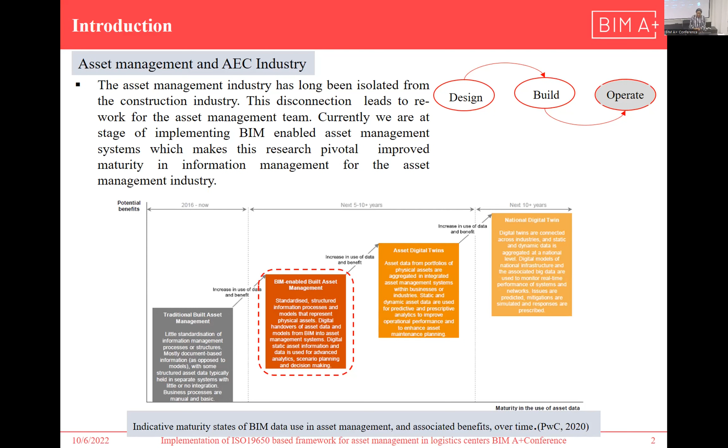And the next stage most likely would be the asset management team taking advantage of the BIM models and using it to create digital twins to manage the assets properly. And assets in this case covers the buildings, the machines, the pipelines, and whatever the client considers to be important for maintenance.

So the project objectives are basically summarized into 5. The first step is to define the information requirements according to ISO, and the information requirements that are specific to asset management are the OIR, AIR, and EIR. These documents are important to asset management. And also to develop the level of information need. But in this case, the level of information need is very specific because it's tailored to meeting the needs of the asset management team. And also create a BIM model, which is just for the case study for this project.

And also make use of COBie to accurately map the data from COBie into the asset management software, which for this case study was IBM Maximo. And at the end of the day, we also wanted to have the BIM viewer within the asset management software environment using Autodesk Forge.

So the thesis workflow is basically, we analyzed existing information from the client. They had existing information in form of CAD drawings, and they have schedules, the current asset management processes, their naming conventions, IDs, and the way they maintain their documents. We analyze this information and we use it to develop the level of information need. And finally, the information defined in the level of information need was used to develop the BIM model along with all the information right inside Revit.

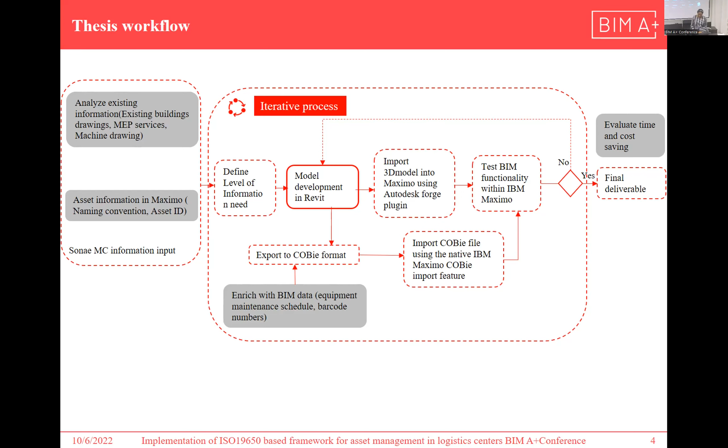Then finally, export COBie data, update COBie data, import COBie data into IBM Maximo, which is the asset management software, and also import the BIM model using the Autodesk Forge plugin into IBM Maximo, then test the functionality and use them to create work orders, and at the end of the day, evaluate how successful it is, how useful it is to the asset management team.

So the first step is defining the information requirement for the maintenance team. This process was a little bit tasking because it's different when you are defining information requirements for construction. But for asset management, you need to ask a lot of questions because they are not so familiar with the rules and with the words we use in the construction industry.

So I had to ask the maintenance team about their goals and objectives. For example, we can see one of their objectives was to reduce corrective maintenance through visualization. And for each of the goals they defined, we attached information requirements to the goals. And finally, standards that would be implemented to achieve these goals.

The AIR basically just defined the scope of the asset information that they want to keep. Because, for example, the clients in this case place more emphasis and more importance on their equipment and their pipes and everything. They care less about the walls or the columns. So it's very important, but we kept less information on these assets in this regard.

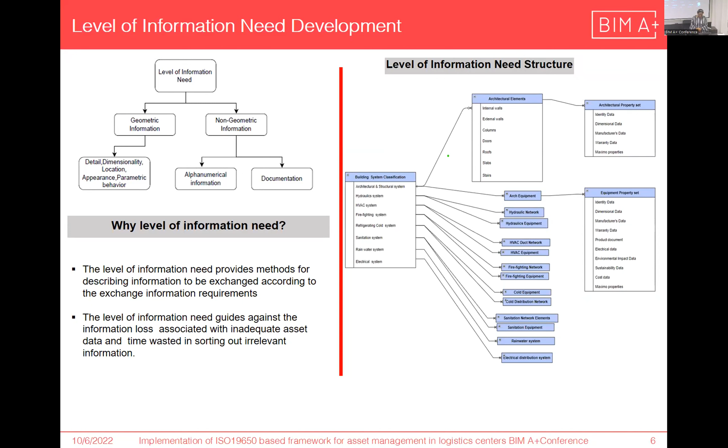So we spent time developing the level of information need because it is very important. It provides the method for describing the information and also leads to time saving, so we don't spend a lot of time sorting out information irrelevant to the asset management team. It also helps us in creating information in a structured form.

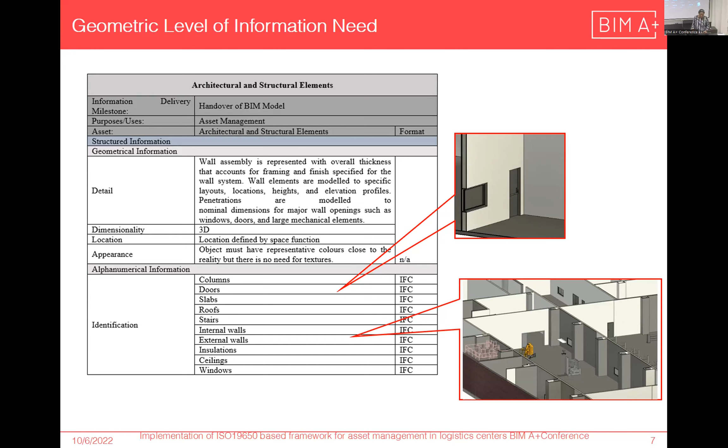For the geometric level of information, briefly, this is an example. We did this for all the other systems. This is for architectural and structural elements; they were grouped in the same group. We defined them in simple English words that can be interpreted by an appointed party at the end of the day. So in this group, we have the columns, doors, walls, and roofs—basically the static parts of the building. We defined their geometric level of information in this format.

Then for the non-geometric level of information need, we spent some time creating property data templates, which is very important to the asset management team. This is just a template that has the property sets that the maintenance team are going to use.

Because at the end of the day, when we create BIM models in construction, we have a large amount of property lists, window sizes, sizes of ledge, and things like that. This information, most of the time, is irrelevant to the maintenance team—they just want specific information on specific assets. So this template was created to guide the appointed party so that they know exactly what is required by operations and maintenance, and they prepare the BIM model to match these property sets.

Finally, from the property sets template, which is like an Excel sheet, we moved them into a shared parameter file because we used Revit. This was done so it can be used for other projects, and the appointed party can have an idea of exactly the properties which should be the project properties within the BIM authoring environment. Finally, the properties will find themselves on the spreadsheet on COBie, which is the attribute spreadsheet, which I'll be showing very soon.

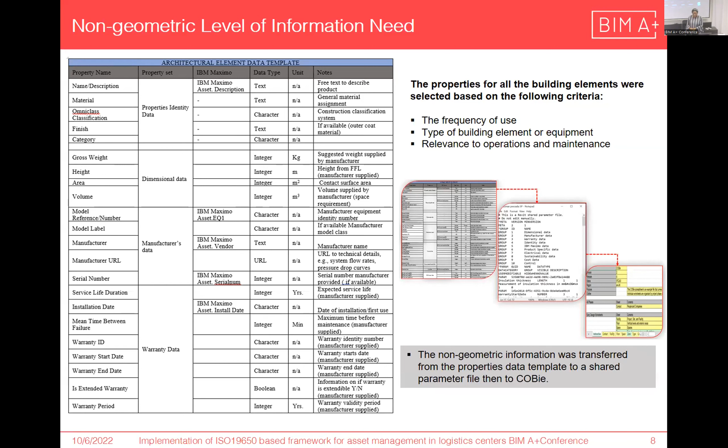One thing to note is that this information was gathered systematically based on the frequency of use of the equipment or assets, the type of building element or equipment—what group it belongs to, whether it's for HVAC, hydraulics, or the refrigerating system—and what is relevant to the operations and maintenance team.

In this case, I had to carry out simple interviews, asking the maintenance guys: how often do you use this? How often do you change this? Do you want to keep information on the heights and things like that?

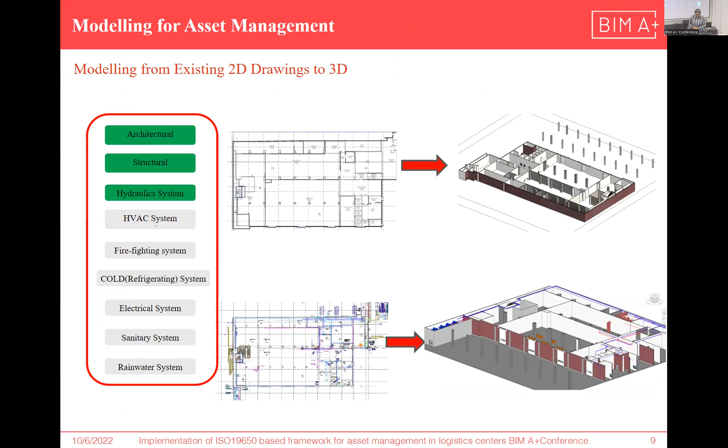For the modeling aspect, basically we followed the information that we defined in the level of information need, and we created a model for architectural, structural, and hydraulics, because we wanted to spend more time defining the information and structure. So we just did it for the systems, as shown.

For the COBie, briefly, I will try to explain the COBie structure. COBie is simple—it is spreadsheets, and on each sheet we have information that has been investigated to be relevant to operations and maintenance, and every piece of information is all linked.

We have sheets that are required—that is, they are very important, they have to be filled. And we have other sheets that are not so important, but you can fill them up if they are important to your operations and maintenance.

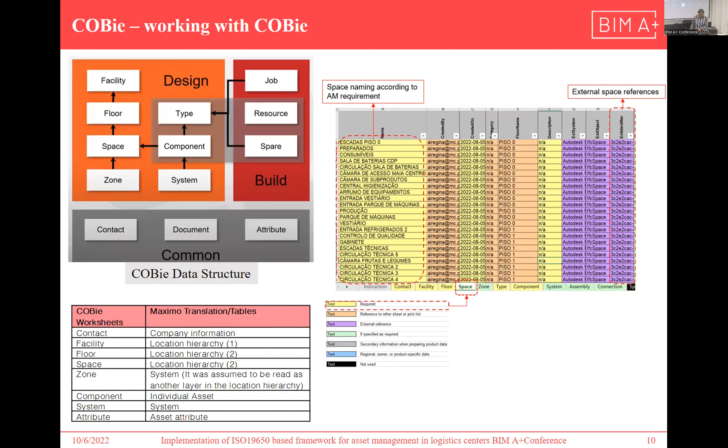So basically, the important sheets are the contacts, which is just the person creating the spreadsheet, or those you feel are the key people in the maintenance team—their names and information can be on the contact. And also the floor, the facility, the space, and components, which is all the assets, then attributes.

These are very important. Then for the COBie worksheets, they were translated to Maximo, which is the asset management software. The company information is in the contact. The facility is also like a location hierarchy, which I would explain in the next slide.

Then the floor is also a location hierarchy, the space, and so on. So basically, let me briefly explain the assets location hierarchy. For asset management, they classify assets in a particular way. It's different for every organization and every company.

They have their own way of classifying assets, and this is different for construction. We don't really do that. We have our classification, which is OmniClass or Uniclass, as you like. But for asset managers, they like to classify assets based on use or location, and sometimes they use both to classify.

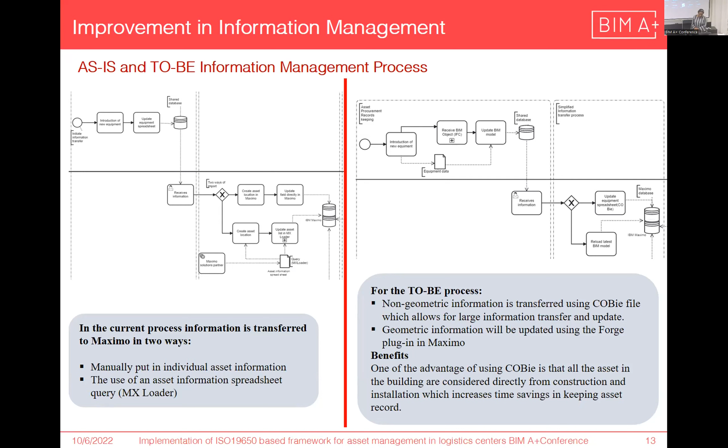In case you have a large number of assets, maybe you are expanding and buying new assets, changing things, you don't need to delete. All you need to do is update, and it automatically recognizes the existing information that was imported and just changes it. This is one of the benefits of using this method - it saves a lot of time and creates structure.

One of the things that is very important that comes with the new process is also geometric information. In the old process, there was no geometric information - you just create all your information based on textual data and schedules. But now the geometric information can be added to work orders and things like that.

So briefly, the conclusion. One of the important conclusions I would like to mention is some of the long-term benefits of having BIM in asset management, which is considerable time saving in fault finding and keeping equipment information, because the maintenance team mentioned they spend a lot of time searching for equipment information, and also cost savings by making informed procurement and repair.

When you keep more information and relevant information, you can make informed procurement. You can keep the names of certain manufacturers if they've been good in the past, or decide to repair when necessary or not. It also improves the overall information management system because you know exactly where each piece of information is, and total operational excellence.

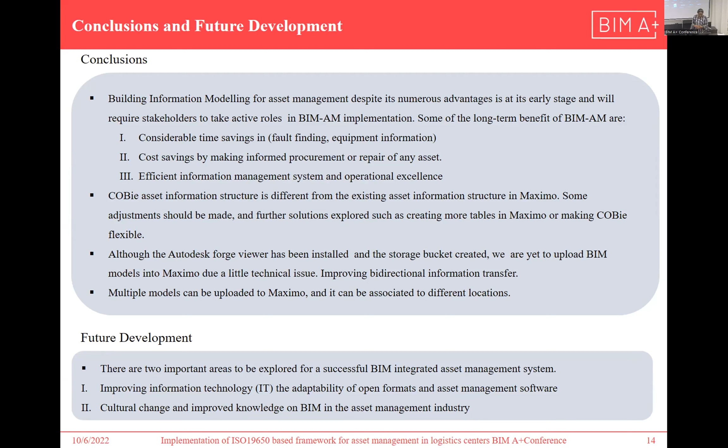They need to be more usable and more adaptable, because people in this industry are not so familiar with these open formats, and also cultural change and improved knowledge in BIM. This is going to take a while because it has to do with process and changes. The asset management industry has its own standards and processes, which is very different from what we have in the construction industry. So there has to be more synergy and more knowledge.

And even in the asset management team, there has to be people and staff members with knowledge of BIM. Thank you.